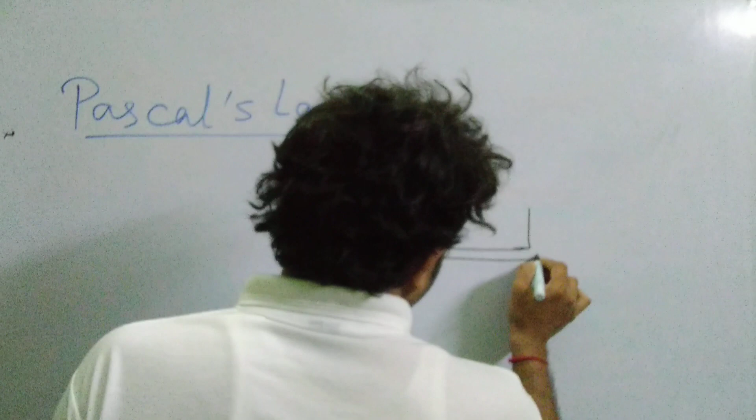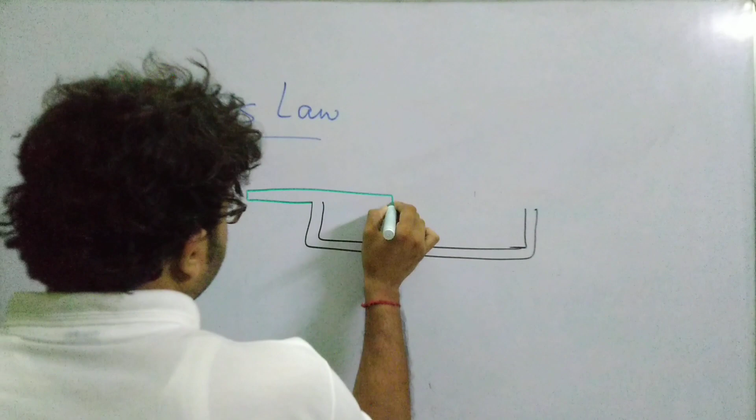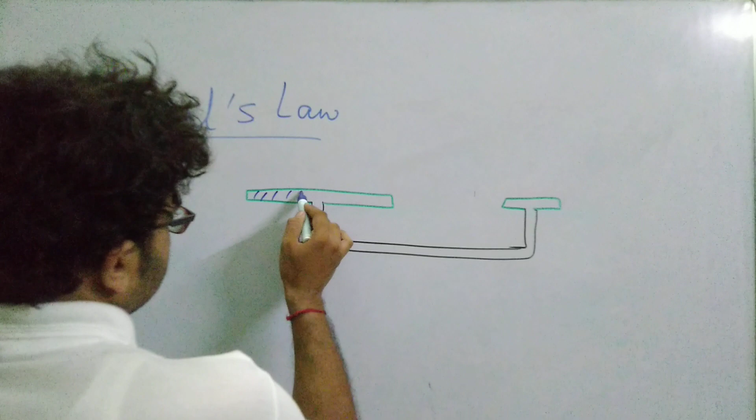Now, using this Pascal's law, let me draw a figure so you can have a brief idea about how it is applied in our daily life. Say there is a section like this - there is a pipe having a fluid running through it. This section has a larger area, and here there is a smaller area. There is a fluid running through this pipe and this entire part is fluid filled.

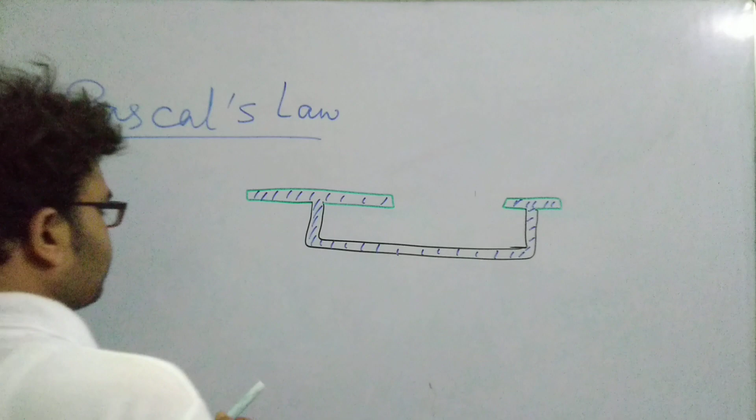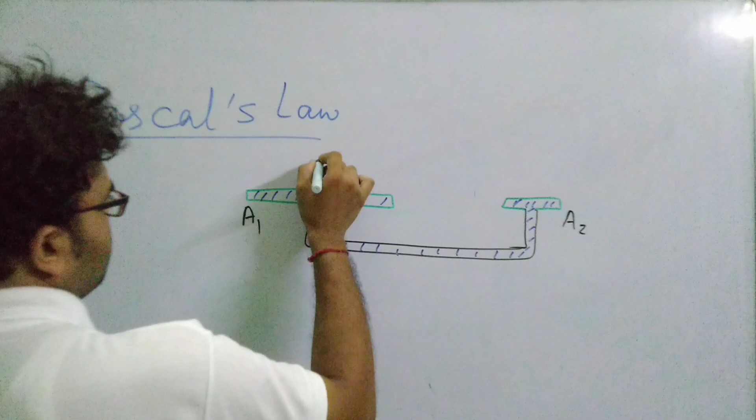Now say if I consider that the area of part 1 is A1, and here the area is A2. We apply a thrust here of F1, and as a result of applying this thrust, a thrust is obtained here as F2.

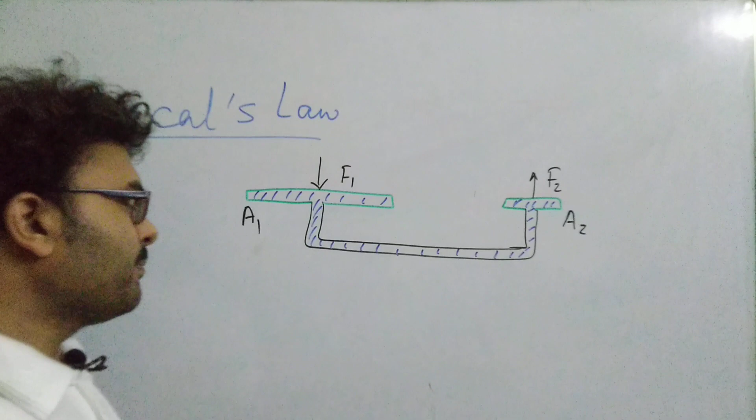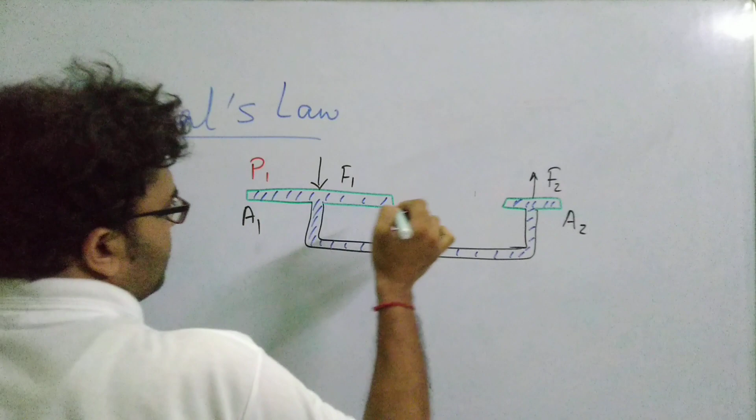Now what happens is, as you know, when you apply a certain thrust on a certain area, you can say that pressure is being applied. So if I consider that the pressure applied here is P1, and due to this applied pressure we get an upward pressure here as P2 - Pascal's law says that pressure P1 must be equal to pressure P2.

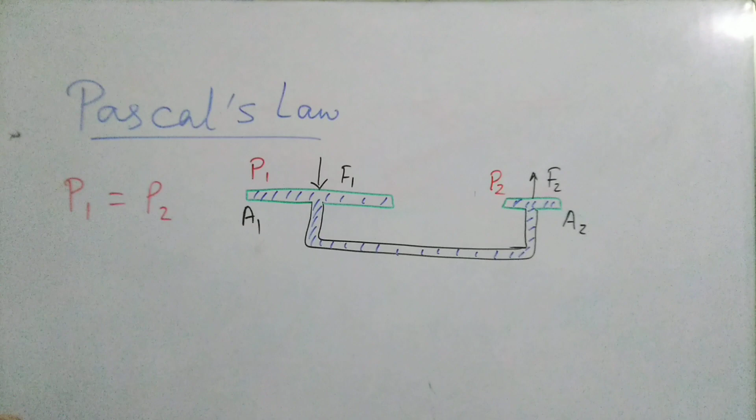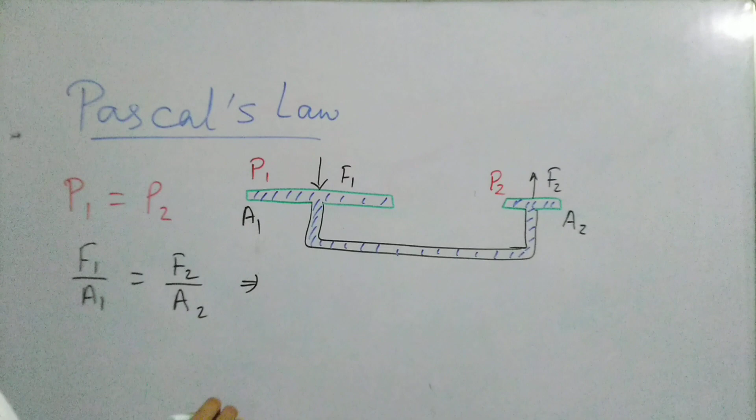Pascal's law states this. So if P1 equals P2, can we say that pressure P1 is equal to F1 by A1? This is F1 by A1, and this is F2 by A2. Now if I take the ratio of the areas and forces, I can say that F1 by F2 will be equal to A1 by A2.

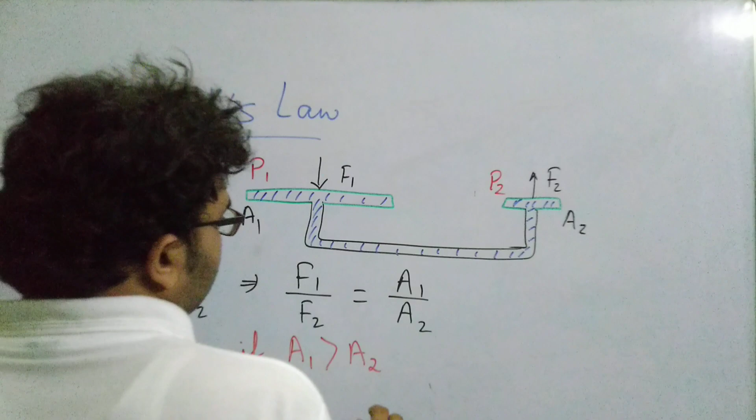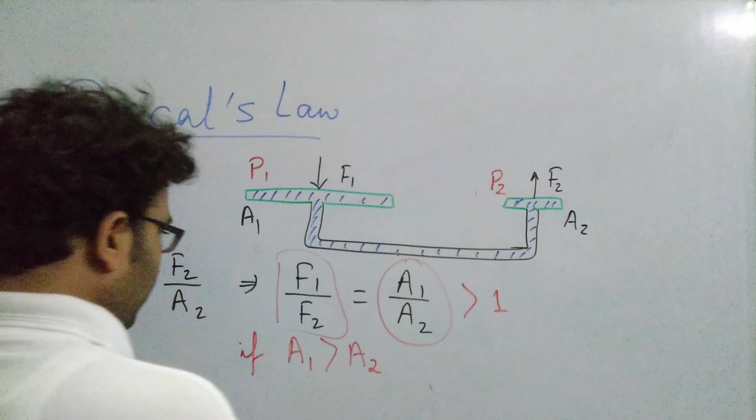Now according to the figure, if area A1 is greater than A2, then definitely this ratio will be greater than 1, and if this ratio is greater than 1, then we can say that this other ratio will also be greater than 1. So if area A1 is greater than A2, then definitely we can say that force F1 is greater than force F2. So what does this mean?

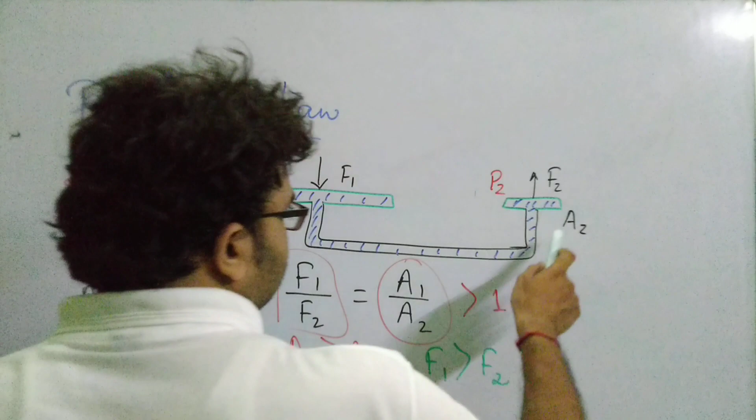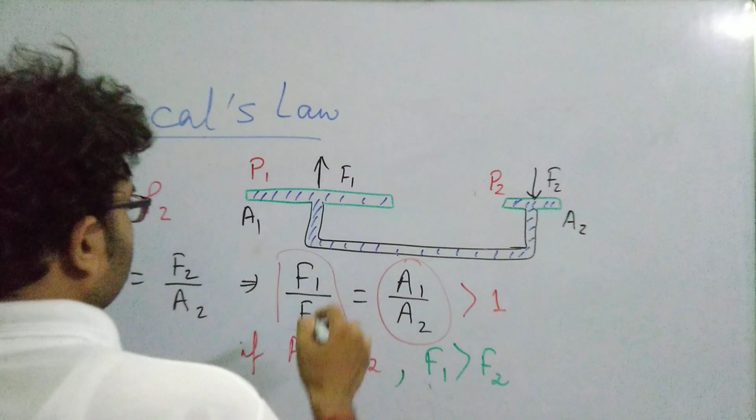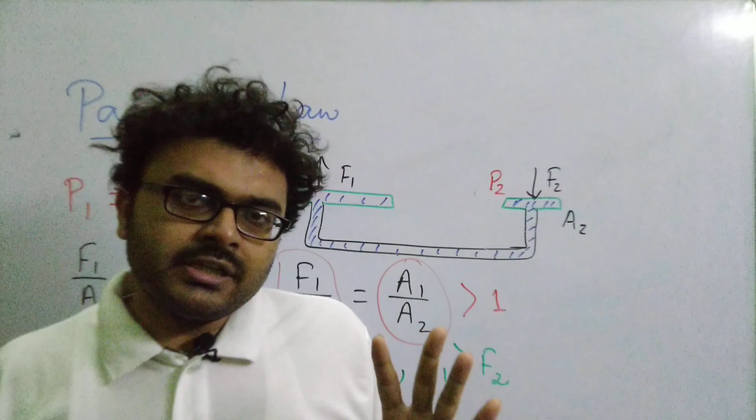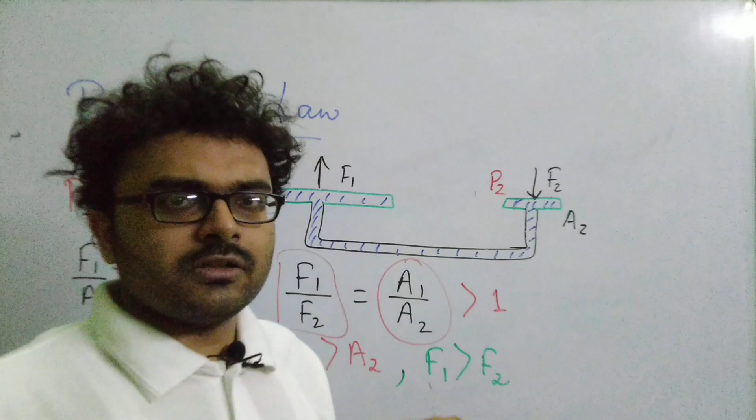This means that if we apply a lesser amount of force - just reverse the direction of the arrows, we apply the force here and get the force output here, the thrust output here - so if I apply a lesser thrust F2, we will get a greater amount of thrust on the larger area. So basically this is the utility: Pascal's law says that thrust is multiplied when applied to a liquid, and if there is a greater area and a smaller area, the thrust applied can be magnified or amplified. This is the very basic application of Pascal's law.

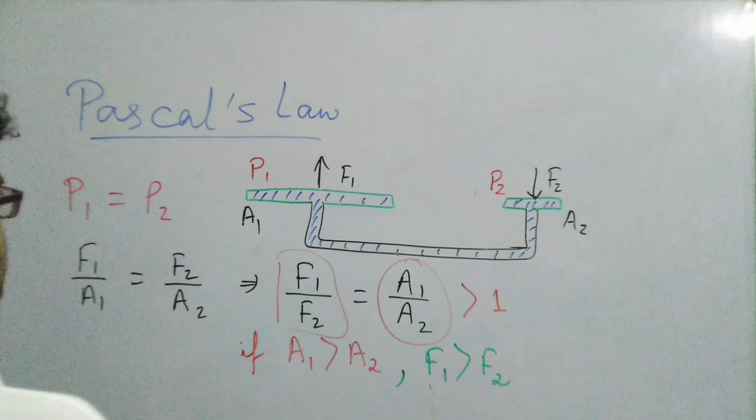And based on this very basic application, there are actually three applications of Pascal's law. Basically, this concept or principle that we have demonstrated here is called the principle of hydraulic machines. So this is basically the application of Pascal's law - the principle of hydraulic machines.

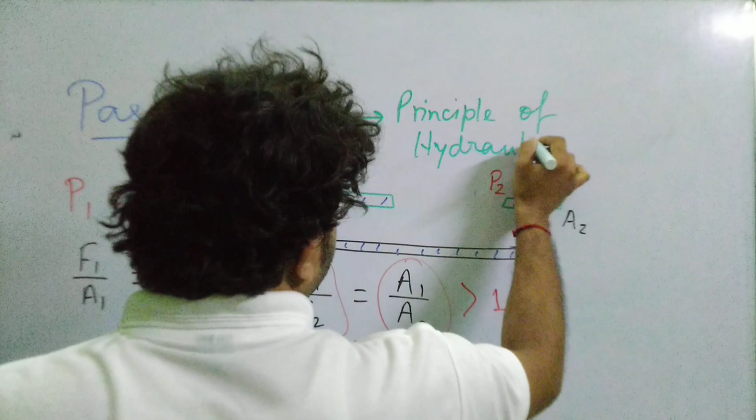These kinds of machines that use this kind of principle are known as hydraulic machines. This is an application of Pascal's law, which we apply in order to design such machines. Now there are three hydraulic machines in our syllabus: the Bramah's press or hydraulic press, the hydraulic brake used in vehicles like cars, trucks and buses, and the third application is the hydraulic jack or hydraulic lift. All three of these devices work on this basic principle of hydraulic machines, so I think the concept is clear.

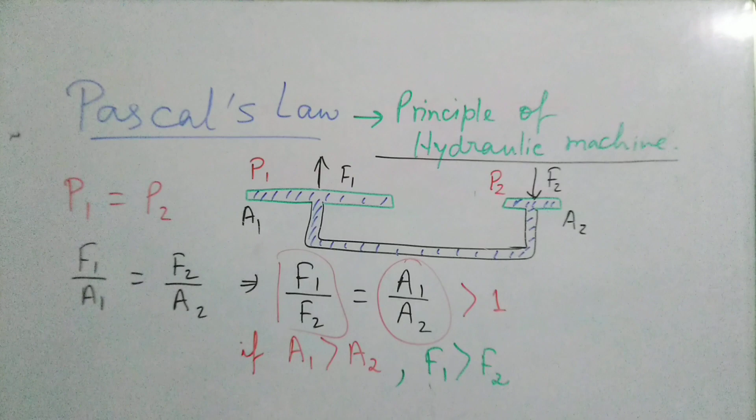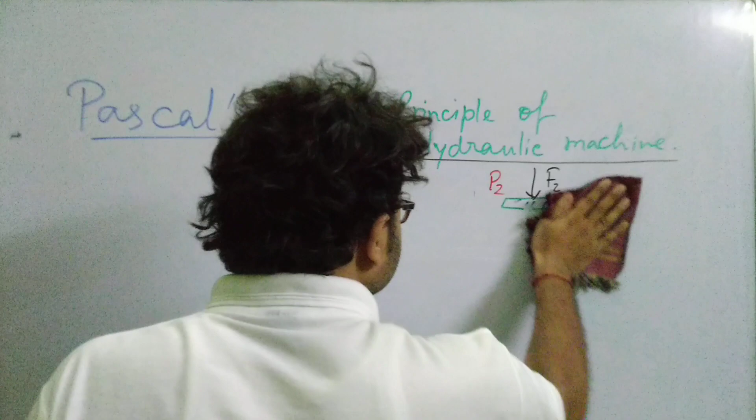Now let us briefly discuss the concept of hydraulic press. What happens in a hydraulic press? Basically, we use this technique to press certain things, like we can press a large amount of cotton into a very small volume, or press a bundle of paper into a very thin volume. These are the applications you can do with the help of a hydraulic press.

So, how is the construction of a hydraulic press? Let's make a heading: hydraulic press. Now what is this hydraulic press? If we draw the figure, there are basically two cylinders. One cylinder is used for applying the thrust, and another cylinder is used for pressing the materials. So one cylinder is here like this, and this is one part of the cylinder.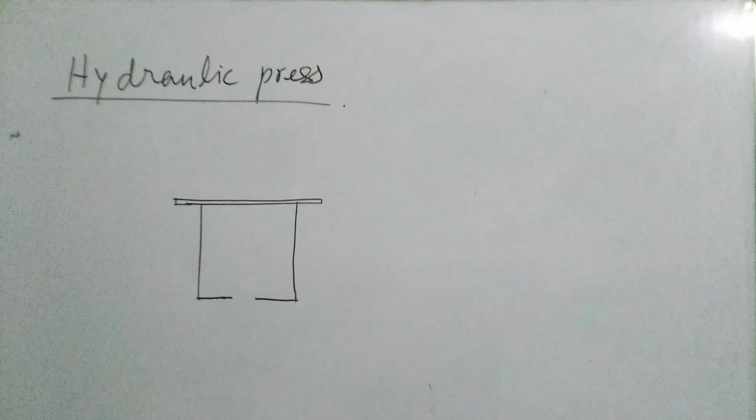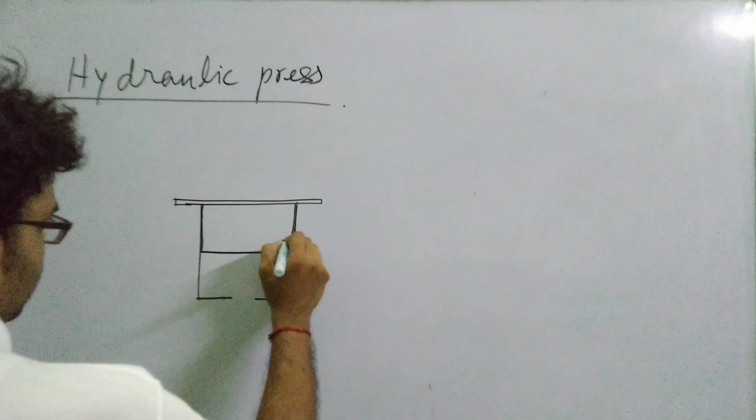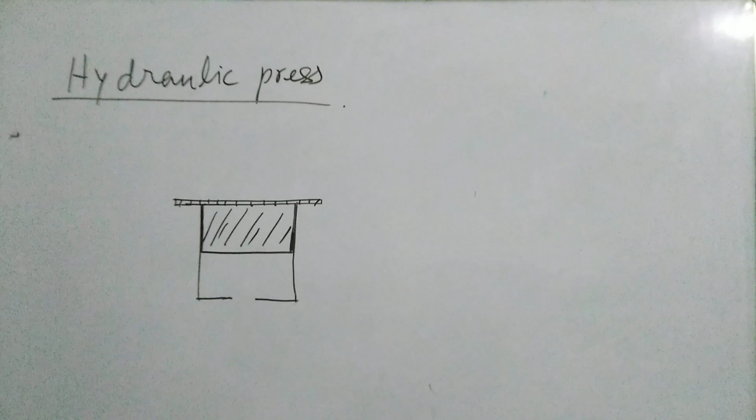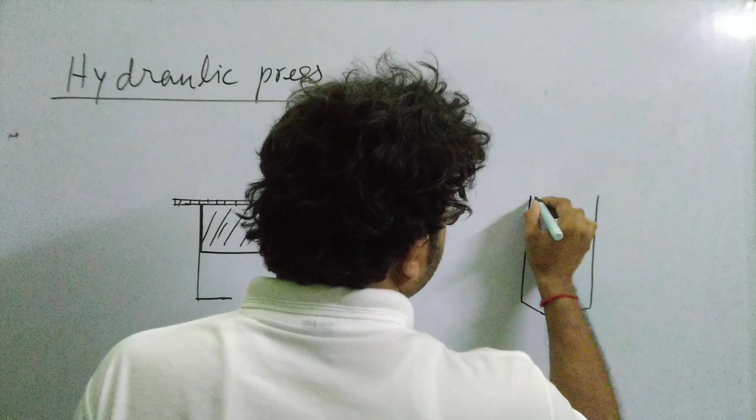So there is basically a piston-like arrangement here. Below is the liquid fluid filled. Another cylinder is up here, and here is also a piston-like arrangement used.

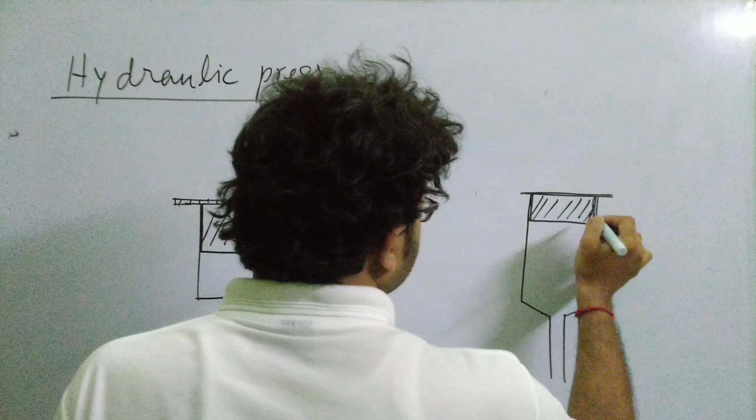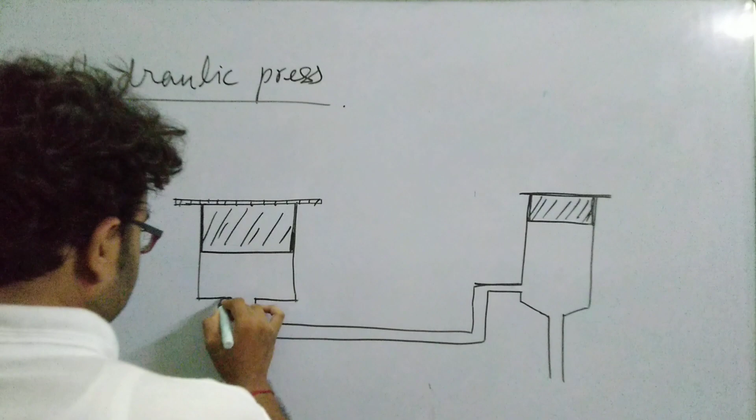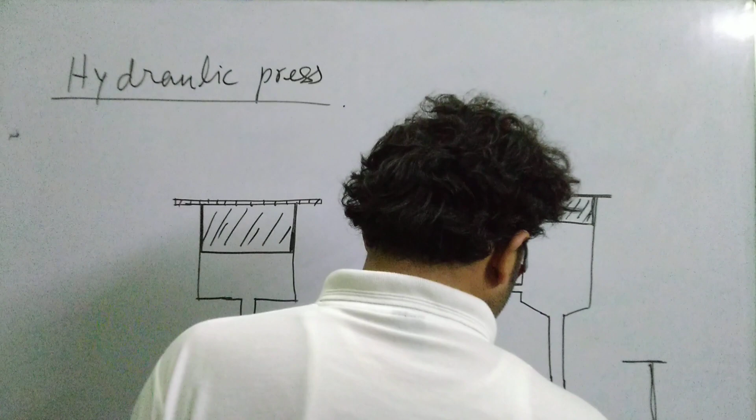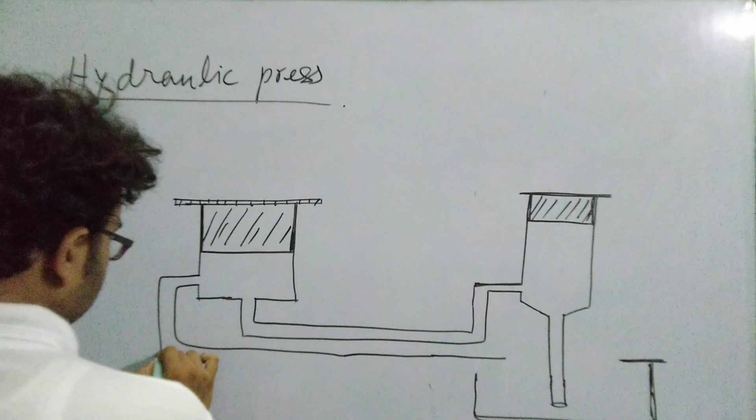Now these two cylinders are joined, connected, interconnected. This pipe goes into the reservoir like this. There is a reservoir here. This pipe basically pulls up the water, or the liquid being used, from here. On the other hand, there will be another connection from here like this, going like this. It releases back the liquid here.

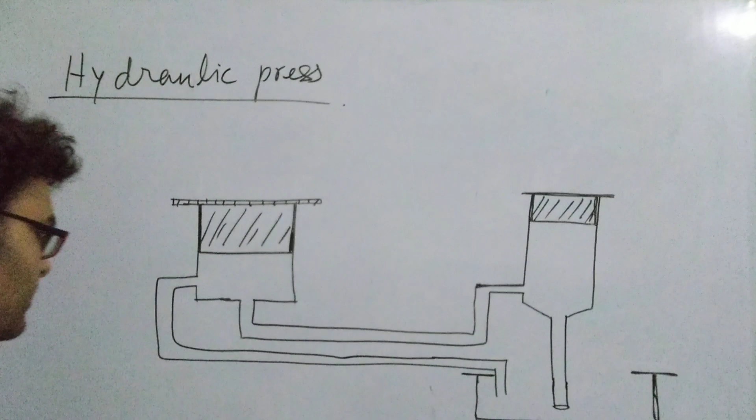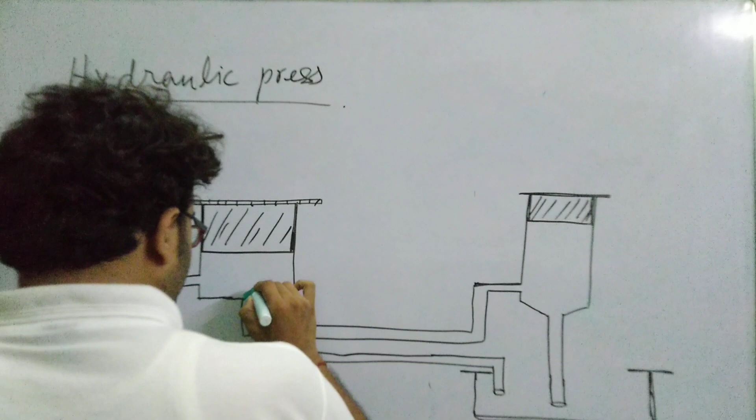There is a valve situated here. Here is another valve that will move up and not down. Here is the structure, and here is its support.

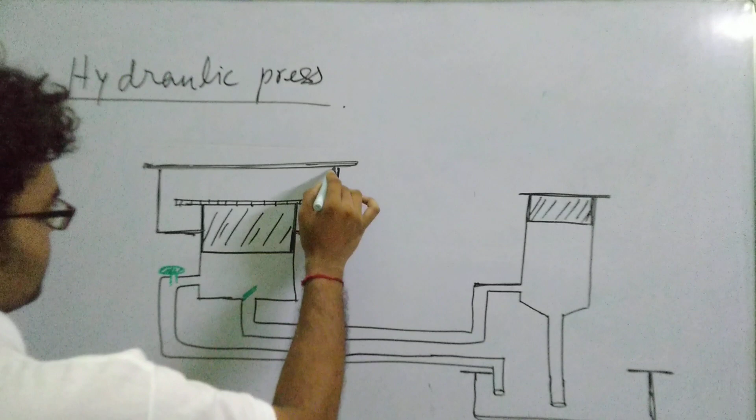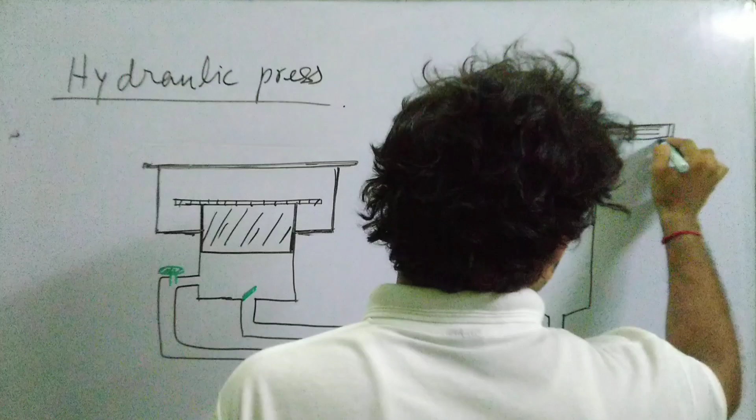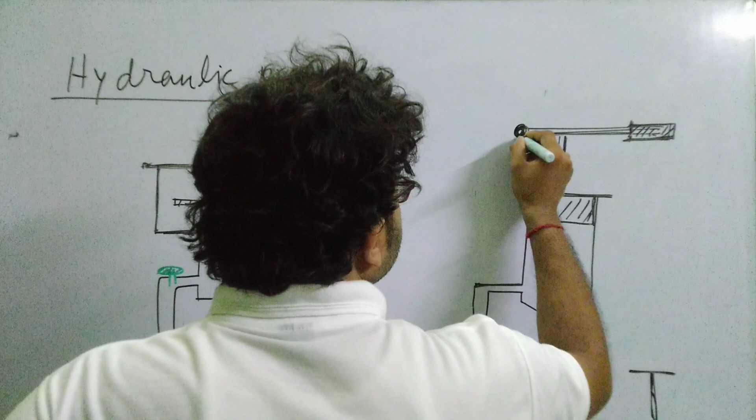There is a plate-like structure on which the materials are placed and pressed, like this. Here the materials get pressed. And there is a lever-like arrangement like this, with a handle attached here. You can actually move the handle up and down.

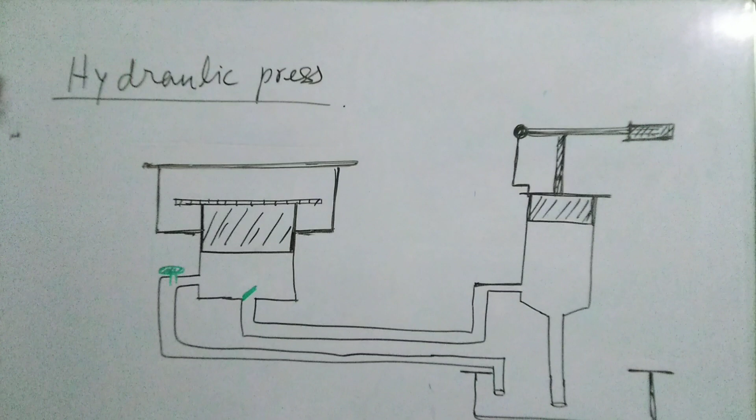So this is the arrangement. Now what happens here? This one is valve V1 and this one is valve V2. Initially this valve is locked here.

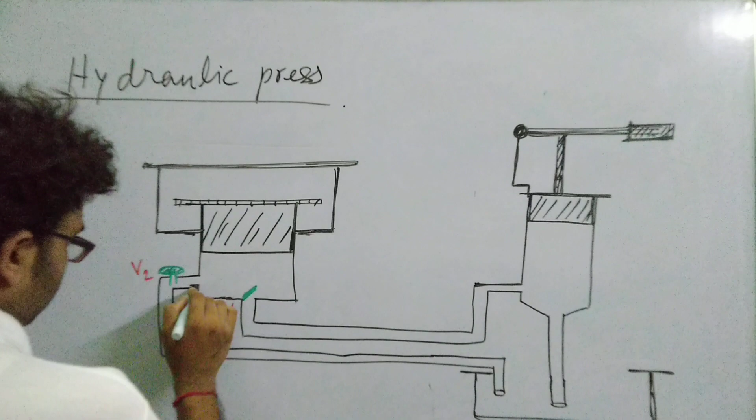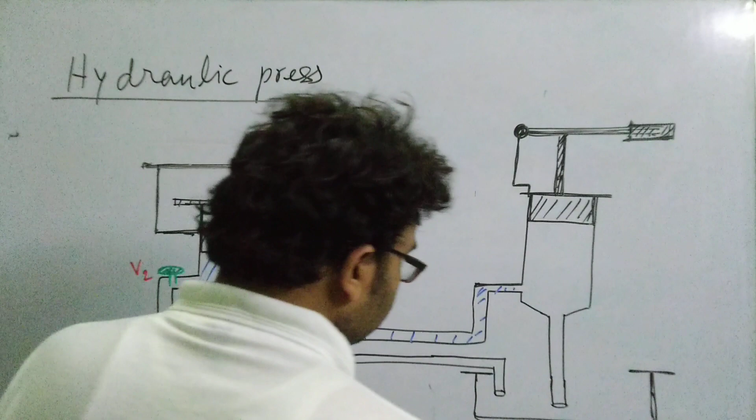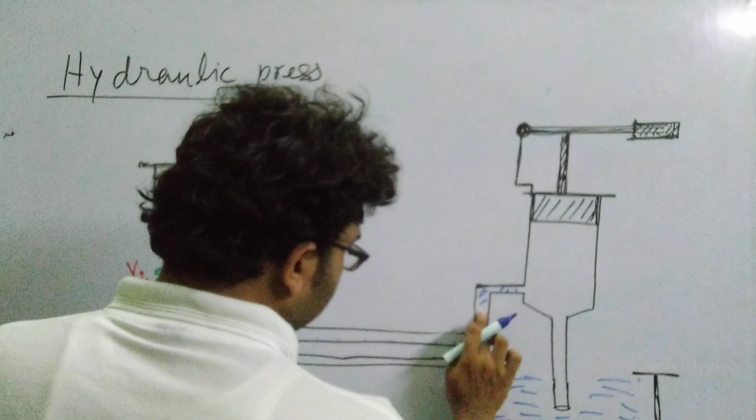And here is the fluid present. So, in the beginning when the process begins, here there is no liquid. This entire space is empty. The reservoir has liquid filled in it.

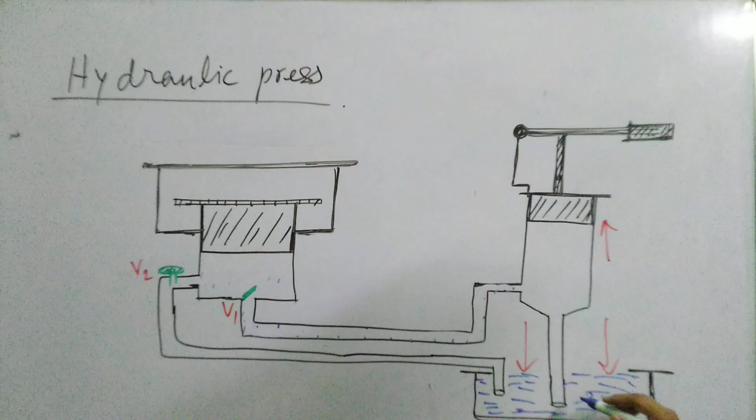What happens when we just move this piston up? When we move this piston up, a vacuum is being created here, or the pressure at this region is lowered. Atmospheric pressure acts on this free surface of the liquid, and this atmospheric pressure basically pushes the liquid up when you move this piston up. So due to the atmospheric pressure, the liquid starts moving up into this space, and this space gets filled up with the liquid.

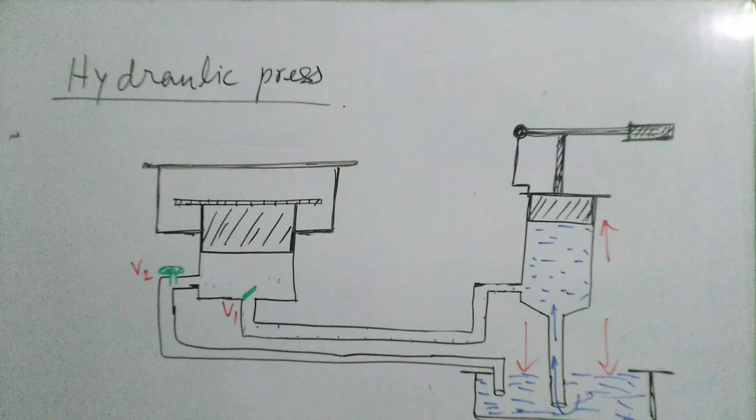Now, when you press the piston here, what happens? This piston, when it comes down, moves down a little bit and comes to this position.

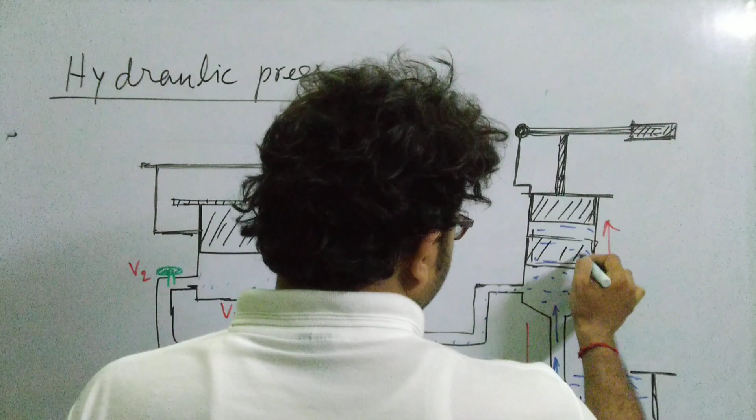What happens? At this position when it comes down, it presses the liquid. Now what happens when it presses the liquid? It will not go down. It will rather escape through this region. It will come out through this pipe and will fill up this entire space here.

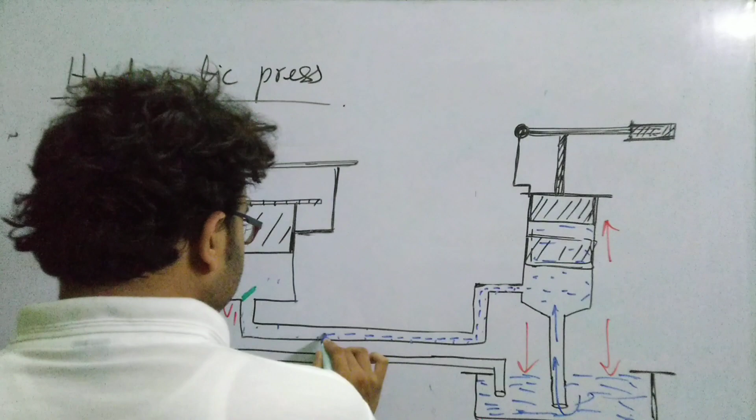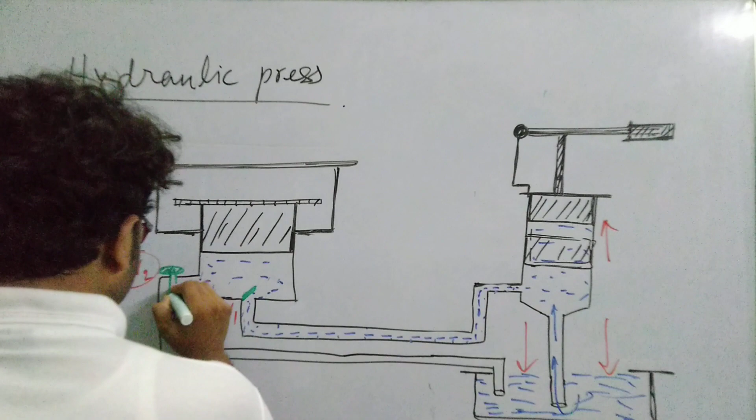Now here the valve V1 can move only upward. So when you press the piston here, what happens? It pushes the liquid up and the valve V1 moves upward and this entire space gets filled up with the liquid. Initially this valve V2 is actually locked, so the liquid just cannot flow out through this pipe. So initially it is locked, so the liquid cannot flow out.

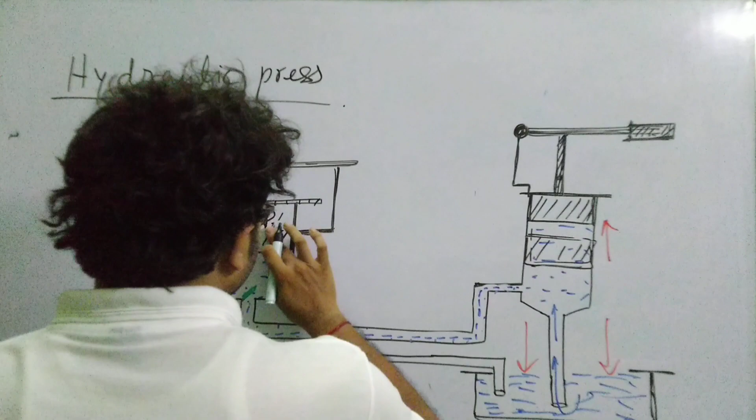So the liquid fills in here and, as we exert the pressure here, it starts exerting pressure on this piston P2. Say this is the piston P2, and this is the piston P1. Now when we just apply the thrust on the piston P1, what happens? It exerts a pressure on the piston P2 and this piston moves up.

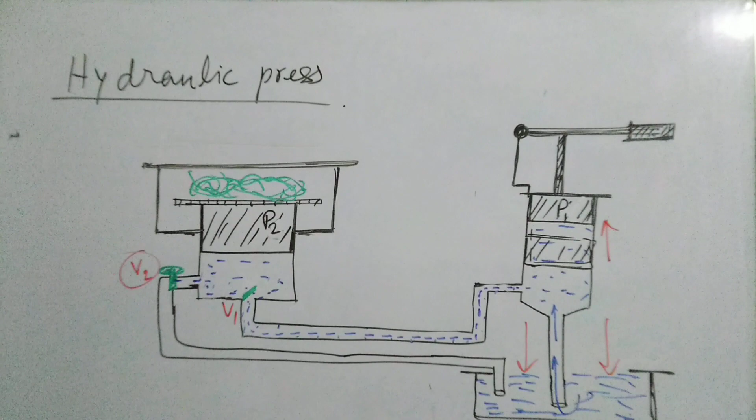As the piston moves up, whatever is being kept, say we have kept a bale of cotton, this bale of cotton will get pressed in between these two slabs. One slab is this and this is a fixed slab. Now when the liquid is being pressed and you need to lower down the piston P2, what happens? This valve will not allow the liquid to go back because it opens upward, not downward. So it gets closed here when the liquid gets up here.

So when you push down the piston here, it will not get down. The liquid moves up and when the pressure here becomes less, it just closes down. Now when the bale of cotton is placed up here and we need to lower down the piston, you open this valve. Whenever you open this valve, the liquid starts flowing out through this region here.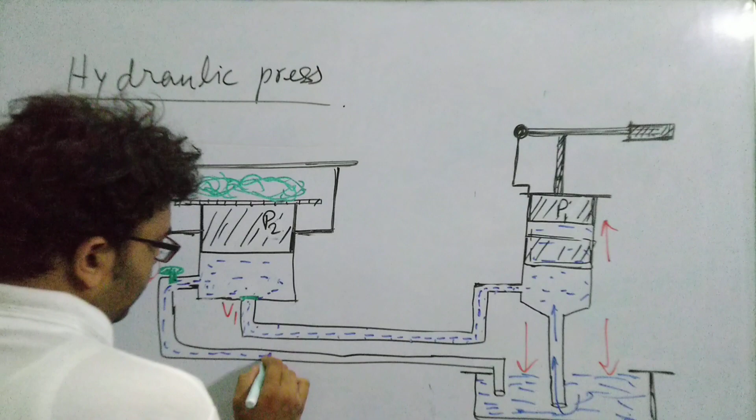When the liquid starts flowing out through this region, the pressure here will get released and the liquid will be emptied here. The piston will slowly come down, this space will come back to the initial position, and the fluid goes back to the reservoir. In this way the piston works.

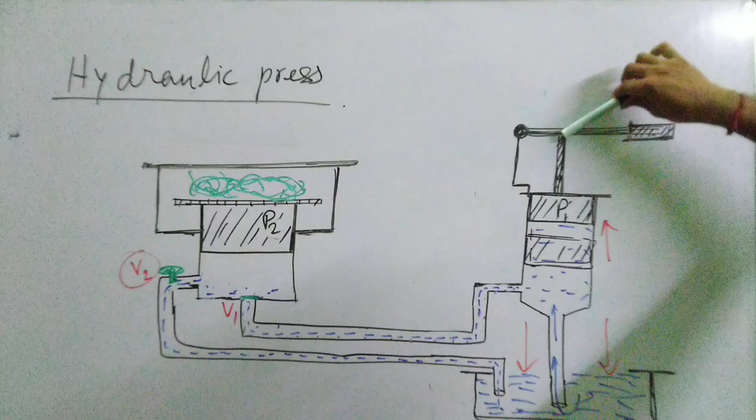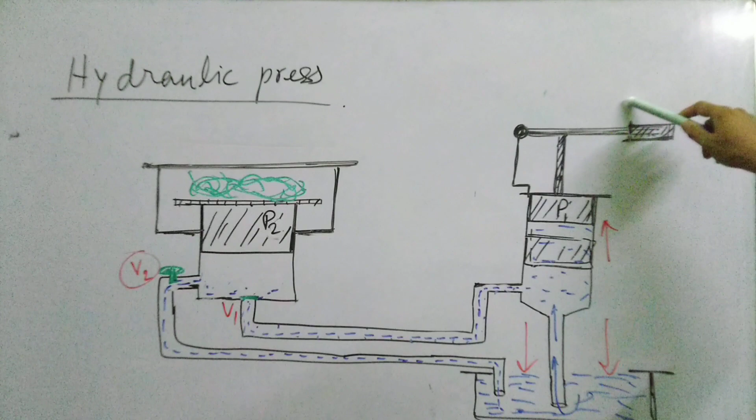And when you want to repeat the process, you have to move this handle up. When you move this handle up, a vacuum region will be created here. Atmospheric pressure works on the fluid here and moves the liquid up into this space. Then when you press down this bar, a thrust is exerted and it creates a pressure that pushes the liquid into this pipe.

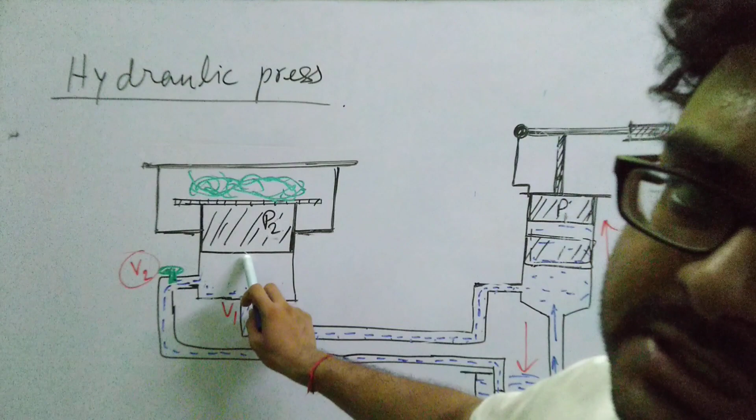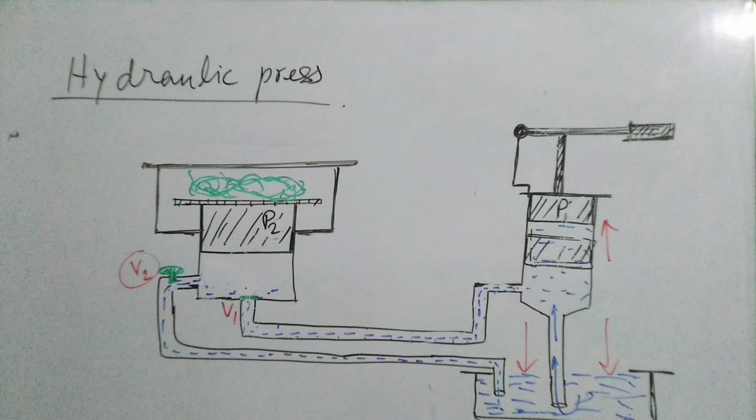This valve V1 moves up and the liquid fills up the space here and exerts the pressure on this piston P2, and this piston P2 moves up. In this way the hydraulic press or the Bramah press works. Oh, sorry, it should be a little down like this. So the concept of hydraulic press or Bramah press is clear. This very simple process is based on Pascal's law.